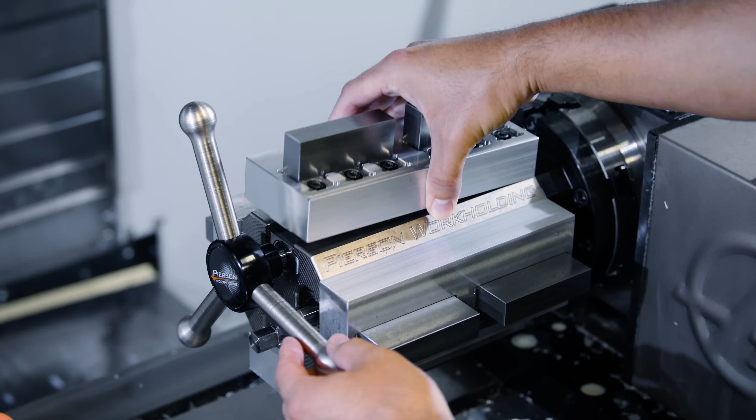Let's get started. I was made for this. I was made for this.

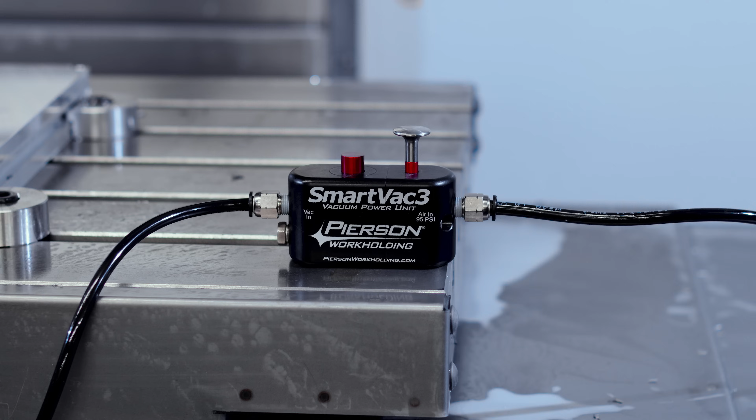Okay, so before we get started, let me give you a quick overview. Now, our vacuum work holding systems use high power vacuum to actually pull the parts down to either our grid surface of the base or our customizable top plates, which is what we're gonna talk about today.

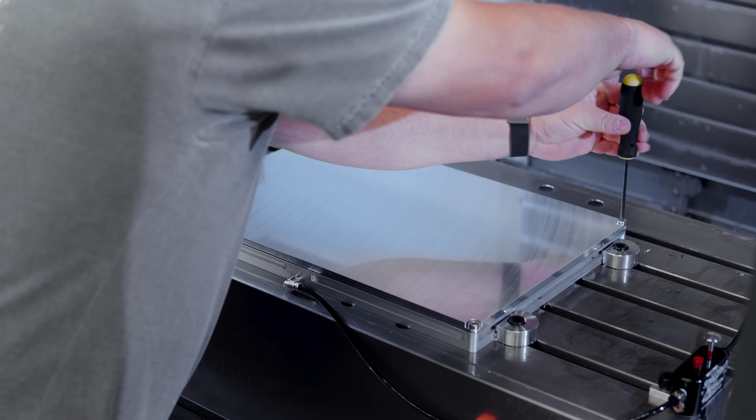But for now, let's take a look at this part. Now, the part that we have here is actually pretty common. It's known as a rack mount panel as a general term. Now, these panels have a standardized width of 19 inches, and they come in different height increments of 1.75 inches. So here we have what is known as a 2U panel, which comes out to 3.5 inches tall.

Now, this part has a couple windows, a few holes with big chamfers. I think that's for lights. 7 holes here that are the same size. I'm guessing those are for knobs. And a couple here that are probably for different inputs or larger knobs. And of course, I'm thinking this cutout here is for a power switch. Again, a very common type of thing that we see on these rack mount panels.

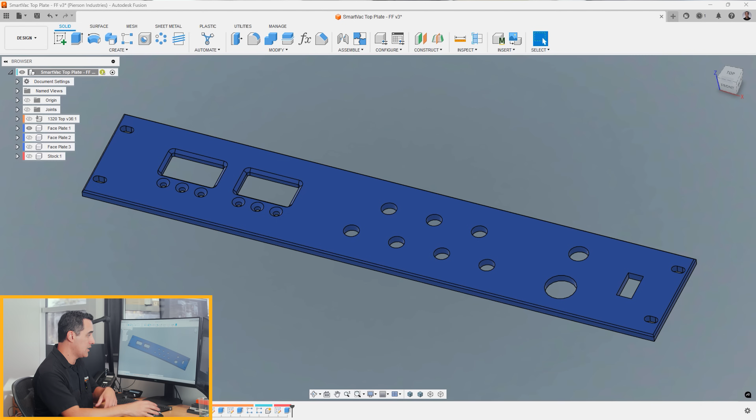But when it comes to vacuum work holding, the very first thing I like to do is to look at what type of surface area we're dealing with, specifically the surface area on the bottom of the part. Now, if I come over here, I'm gonna get a quick measurement. Now I'm using Fusion 360, and by just clicking this flat plane, it gives me the area. So using a calculator, 56.5 times 14 gives us 791 pounds of holding force.

That's great. Now 14 is the power of a vacuum. Now specifically our Smart Vac system, for every square inch, it will pull that square inch of material down with 14 pounds. Now that 14 pounds is not an actual limitation of our system. This is the actual air pressure around us pushing down on the part, trying to fill in the vacuum of air that we will be removing from under the part.

Now, the main rule of thumb is if you can hold a part using a clamp or a vise, you just stop and you do it. Now, this is because clamps and vises have a theoretical unlimited amount of clamping force. The harder you tighten the handle, the higher the clamping force. Of course, it'll break at some point, but still the amount of clamping force is theoretical, whereas vacuum maxes out at that 14 pounds per square inch number.

But as I look at this part, it's a decent candidate because we have to machine around the perimeter of the part. We have to poke a bunch of holes in it. And if we had to do chamfers, which we do, we can access them without, again, hitting any clamps or vises along the edges.

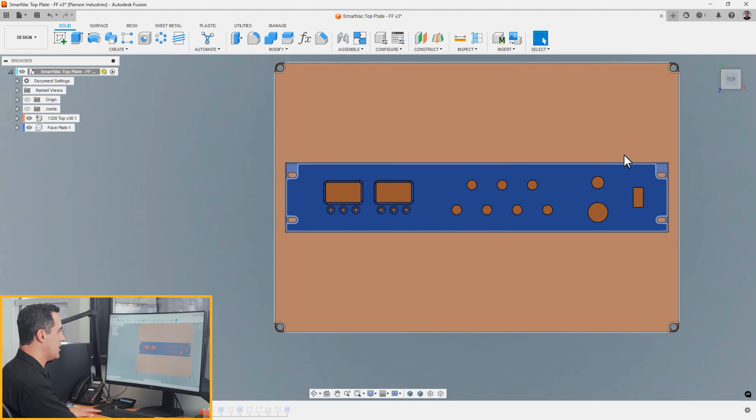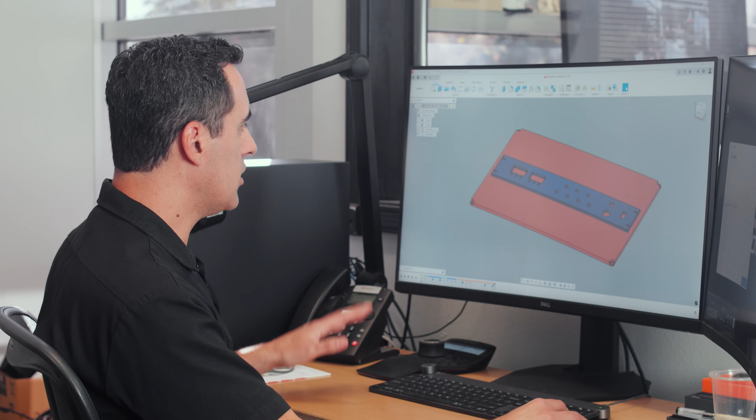Okay, so let me start off with a top view. Now, just to start off, this is a 13 by 20 inch top plate. Now, these are off the shelf products that we carry a full stock on. Now, when I first look at this, the way that I like to design is I want to put my part and I want to lock it to the center of the top plate. I've gone ahead and I've already done that. Now, let me hide our workpiece and let me show you the design work that I've done on the top plate.

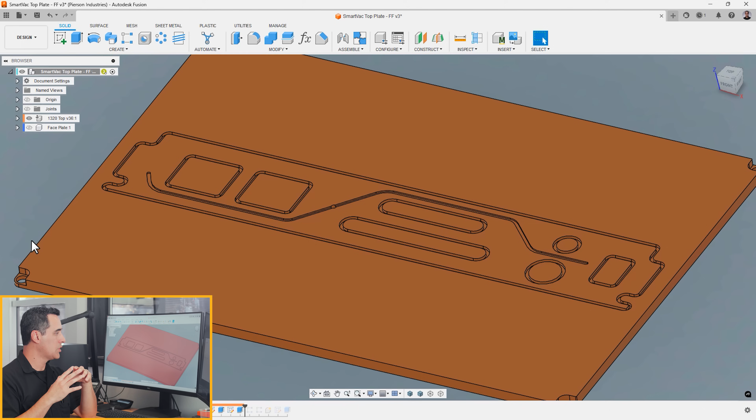Now, as I hide the part, that reveals a few different grooves that I've cut into the top plate. Now, the grooves in our top plate is what actually creates an airtight seal around every feature that's on the outside of the part or any features that break through. So you can see that it does look complicated, but it's actually pretty easy to do. Let me turn the part back on and give you kind of a see-through view of the part.

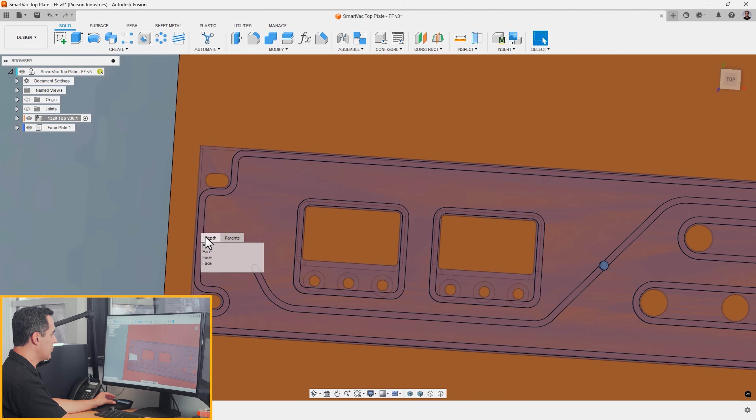Now, as I explore around here, you'll see that some of the features that are holes that break through are outside of this gasket groove, highlighted in blue. Now, along the outside is one thing, and then every feature along the inside is a feature that breaks through as well that's also gasketed off. So for example, these windows here, you have the holes, the 3 holes for what I'm assuming are the lights, and then the window for probably like some type of voltage meter that breaks through.

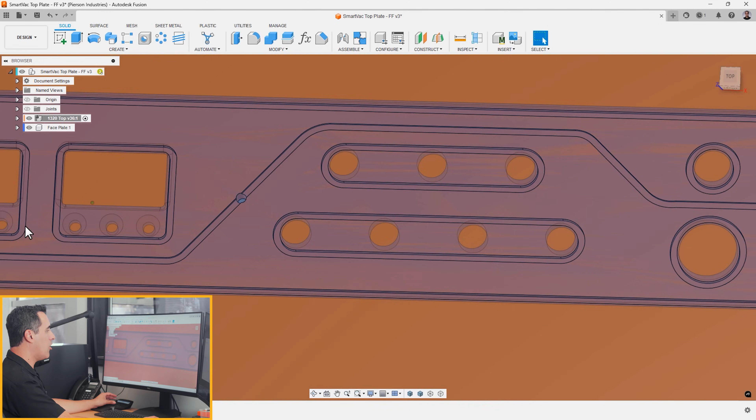All the knobs, and notice that there's a difference between these holes here, this grouping of holes, and these 2 individual holes. Now the grouping of holes, I like to do that because it's best to not individually gasket small holes, because it's actually kind of hard to get our gasket cord stock to wrap around on a round portion and then splice them together perfectly. I prefer to splice them on one continuous straight edge.

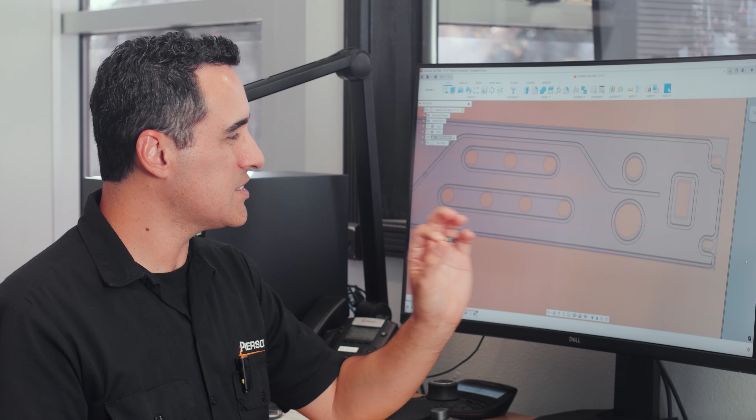But you can see I went with gasketing off these 4 holes and these 3 holes. Then these 2 holes, I could have gone to group them together, but because they're a slightly larger diameter, I'm going to gasket them off because I do want some air to flow in the middle. Now you do see as we zoom out, this odd kind of hole or slot right here. Now that looks weird. I'll explain that a little bit later. But for now, just focus on the gasketing that I've done in the top plate.

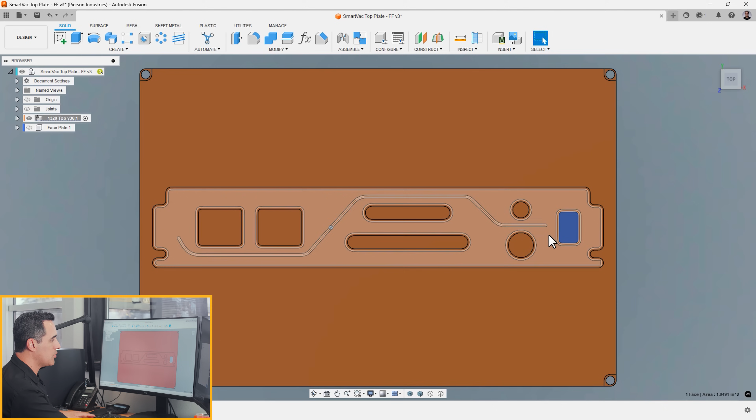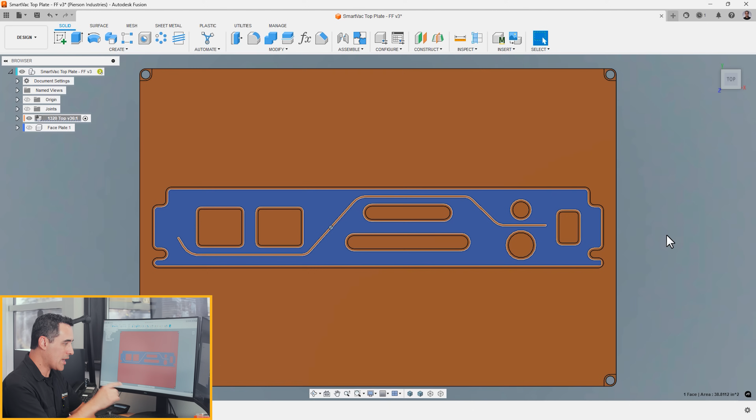So now you can see that all the features that break through are going to break through into these areas here. All these areas that are on the outside of the vacuum. Everything in orange here is going to have vacuum work holding applied to it. Now, remember I had that number of the surface area, 791 pounds of holding force. Now that we've created this gasket pattern, this area right here is the actual surface area that the vacuum is going to see. So right now, Fusion is telling me that it's 38.8 square inches. Now I'm going to multiply that times 14 pounds per square inch, and that gives me 543 pounds.

Now that's a lot lower because the gasket and all the little things that we've cut out takes away from the surface area. So the name of the game here is to always have to chase after surface area. More surface area means higher holding force. 543 pounds is still pretty good for this part, but we're going to have to adjust our approach so that we can bump up our feeds and speeds and actually stay productive.

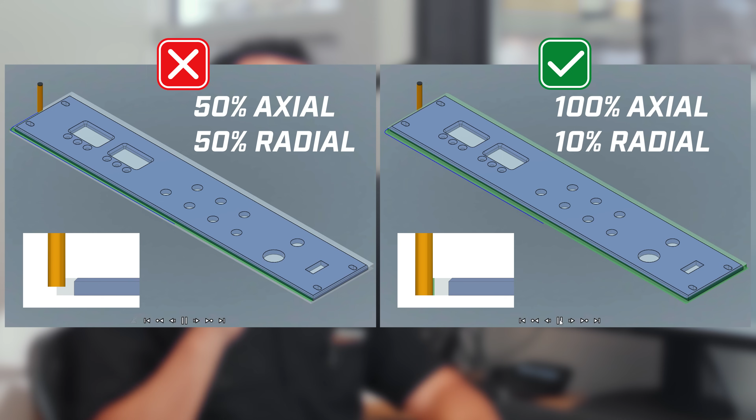Now let's take a quick minute to talk about feeds and speeds. Now the enemy of vacuum work holding is not lifting forces from the cutting action. It's actually the side loads created by the cutter entering the part. So the strategy for machining in vacuum work holding applications is light radial depths of cut and normal axial depths, because we're dealing with thin parts. They're not tall. This particular part is only 1/4 inch thick. So we go full depth and light radial loads. Now we want to aim for about 10% of the cutter width, and then we bump up the feeds and speeds so we can zip around the part faster with lighter loads than actually going into the part itself.

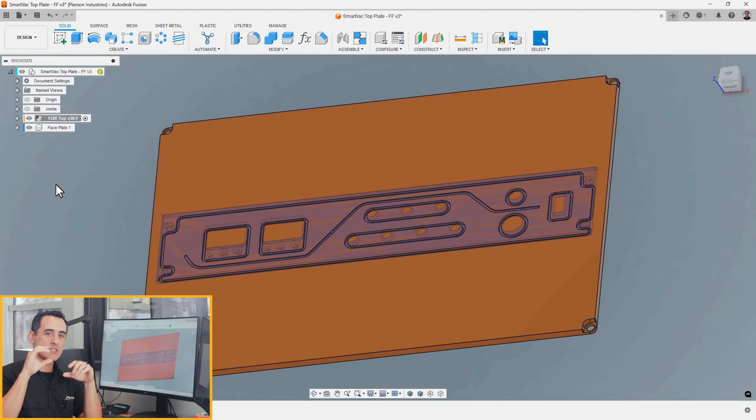Now here comes the caution. Now we do have a large flat face that oftentimes people want to remove material down to a specific thickness. But face mills, especially face mills with large diameters, impart massive amounts of side loads. Now, if you needed to face this part down to a dimension, you'd want to do so in a second operation with a couple pins along this back edge of the part.

Now, that way, the clockwise direction of the cutter moving from right to left is pushing the part into those pins. We're not minimizing any cutting forces, we're just directing them into pins that are going to add to the rigidity and the security of the entire application. Now, if we didn't have those pins, we would run the risk of the cutter incrementally sliding the part over, and once it gets off of the gasket cord, you have a break in the seal, and that's when your part has a chance of turning into a very nasty frisbee. Now, let me show you one thing that I talked about earlier.

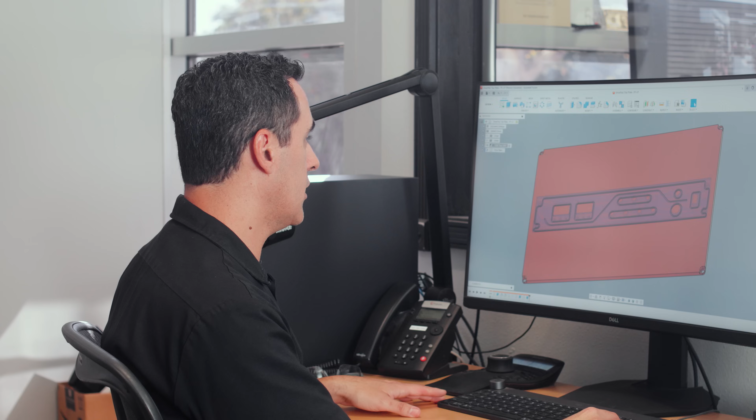So remember this groove here in the middle? Let me highlight it. It's actually a different depth than the rest of the gasket grooves. Now, if you notice, this gasket groove is not full depth because it breaks through into this through hole.

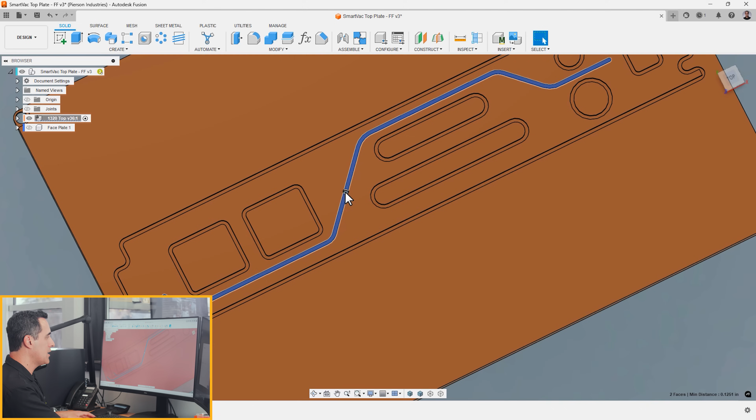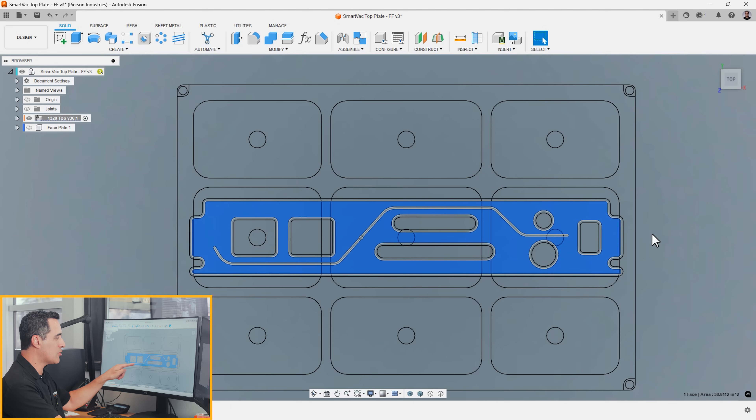Now, this through hole, if I give you a wireframe view, is what introduces vacuum from the chuck surface up through the top plate into this gasket area that I've created. Once it flows into there, we add this weird groove to help the vacuum or the air flow across the surface of the part.

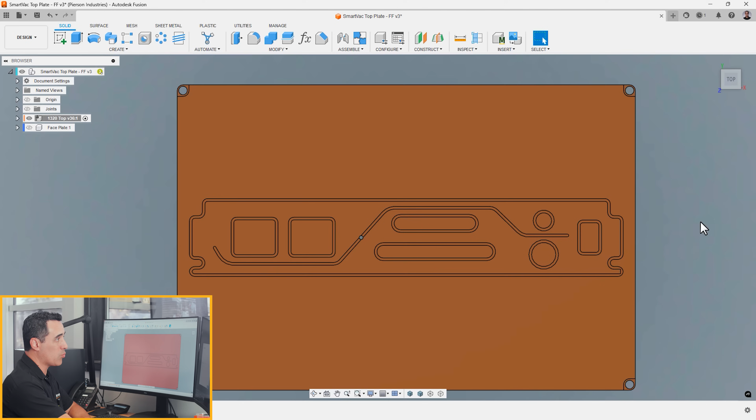We do that because there's a chance that parts can self-gasket to the vacuum chuck itself, especially around the small diameter of the through hole. So if you are working with a really thin part sitting on the top plate, you might have 100% vacuum at the center, at the through hole, but it might slowly leak and lift up along the edges. We definitely don't want that.

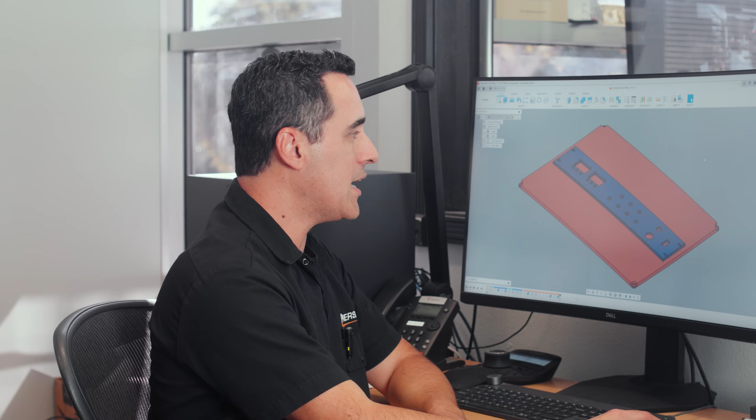So to minimize that, simply adding that groove that snakes its way around the different features is going to create a lot more opportunity for the vacuum to spread across the entire face of the workpiece.

Now, another question I get is, okay, I'm gonna drill a through hole, but I want more vacuum. So do more through holes mean higher vacuum? No. And actually, we recommend you only do one through hole. The reason is more through holes just means that the airflow is divided. If you have two, it's divided between those two. If you have one, all the air rushes through.

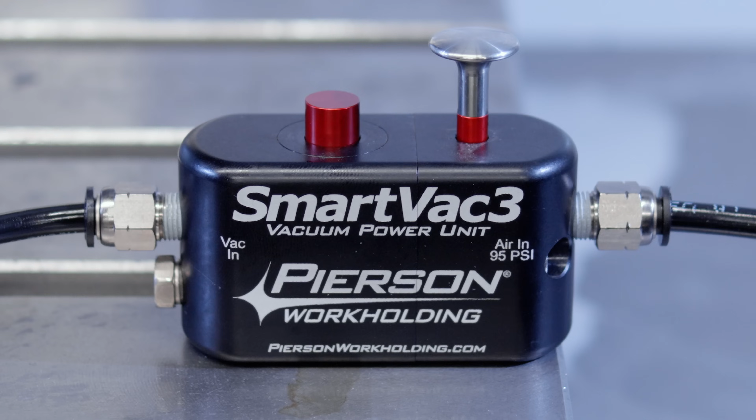Our vacuum power unit pulls vacuum on a 1320 chuck in about 1 to 2 seconds. It's going to reach maximum vacuum in just a couple seconds. Adding more through holes could, in theory, increase that, but you couldn't turn on the vacuum, close the doors, and hit cycle start in 2 seconds. At least I can't. So one through hole.

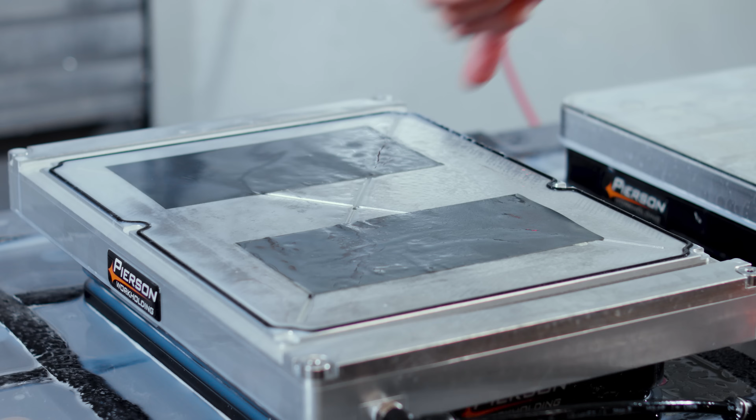The other thing is you want to minimize the chances for chips or swarf or particles to enter the vacuum system. With one through hole, you can literally put your finger on it and blow chips off of the top plate, and then when you're done, lift it. That's how you assure good working conditions to not clog the vacuum power unit.

Now, quick note, the vacuum power unit can deal with coolant. You're going to ingest coolant, and of course small particles, swarf-like things. But when things get clumped up, or if someone didn't clean it out after the end of the run and put it on the shelf, the coolant dries on those chips, the water evaporates, the concentrate sticks around, and it turns to a really thick sludge that can easily clog the VPU the first time you run it on the next job. So we always want to work with a clean working environment.

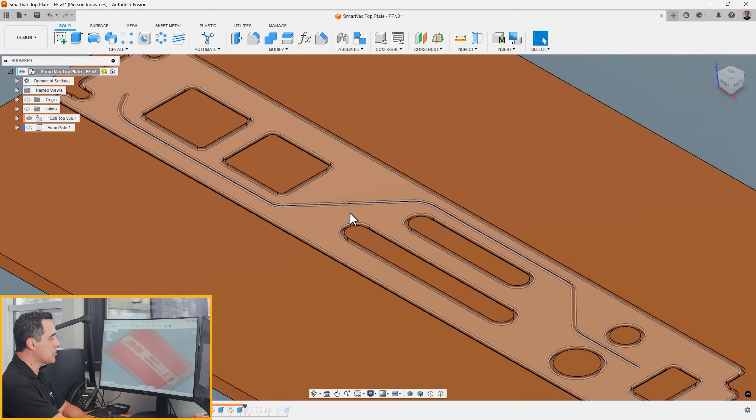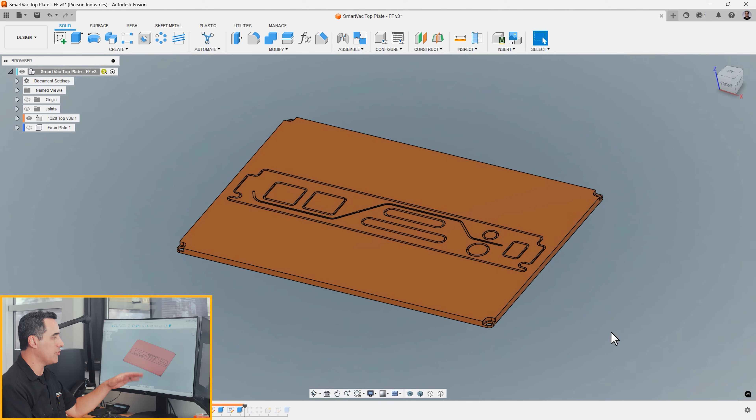Now, when I poke this through hole, how did I pick that? Did I dimension it? Well, no, it's actually randomly picked, but I pick it to break into this pocketed area. When you poke through with a drill, you can drill into any one of these 9 pocketed areas. They're about 50 thousandths deep, and the vacuum from the grid surface of the vacuum chuck flows into these 9 pockets. So anywhere you poke into them, you will get full vacuum flow to the top side of your part.

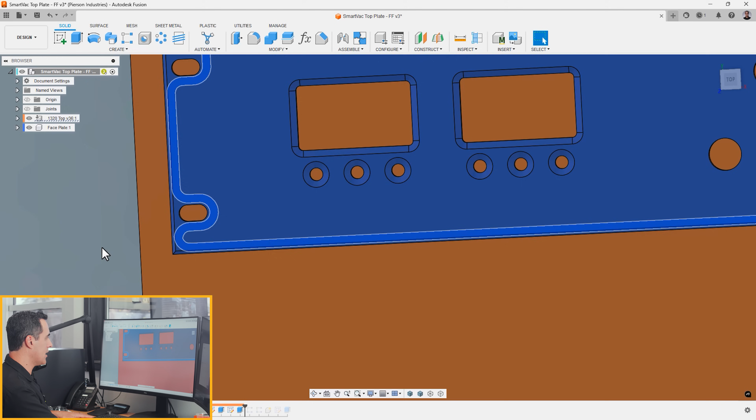Now, there's one last thing I want to draw your attention to, because it's a mistake that I intentionally left for this illustration. I'm going to zoom into these corners. When we run our gasket in this groove, we're doing everything right because our part is gasketed correctly, but there's a difference between these two corners.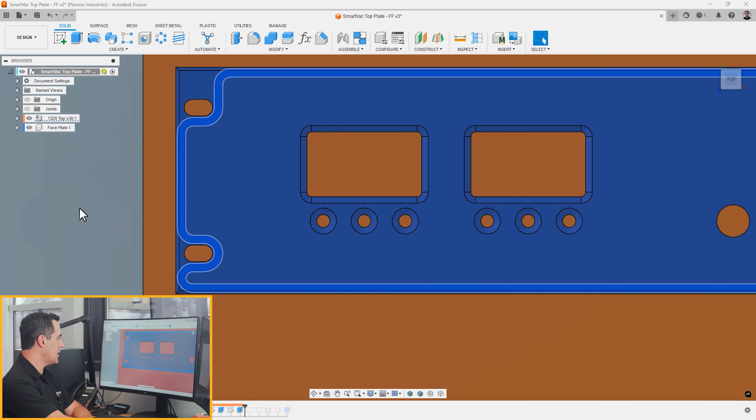You can see what I did here with this groove. I went around this oblong hole and snaked it around to, again, maximize our surface area. Over here, I didn't, so we have a corner free floating. The truth is that this section is not actually going to give you very much vacuum work holding. In fact, you will have your part sitting up high in that section, because there is just not enough surface area to fully compress the gasket surrounding that area.

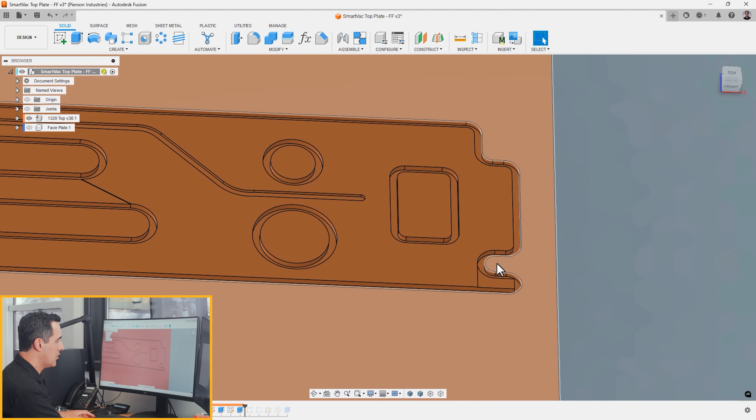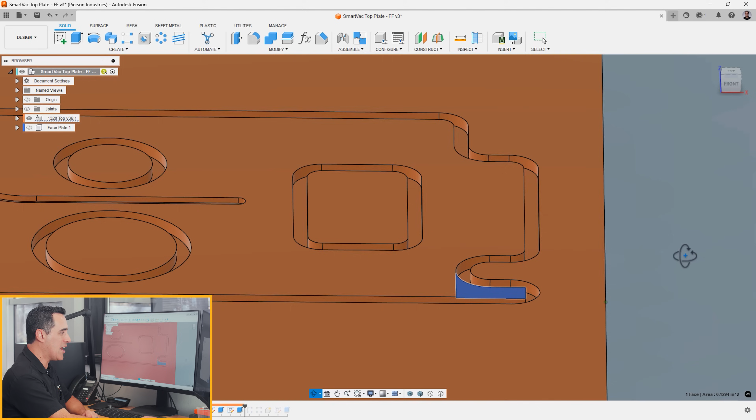I made a feature here, a little quick cut to illustrate. Okay, so this little surface area here, if you can see that, I left some square corners. Fusion is telling me that that is 0.1259, let's round up to 0.13 square inches. If we multiply that by 14, that's only 1.82 pounds, I'll give you in ounces, 30 ounces of downward force trying to compress that gasket.

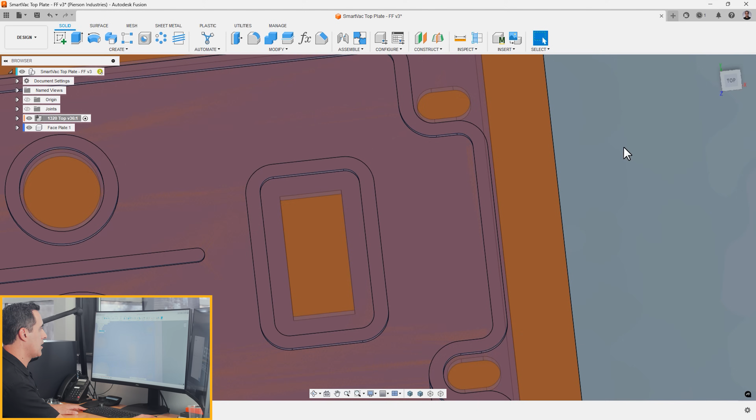30 ounces is not going to add to the rigidity of the part. It's going to barely be enough to compress that gasket, so it's kind of a wash. So the better thing to do is just cut off the corner as shown up here, so that we can actually skip that bunched up amount of gasket and just go straight to cutting the perimeter.

Now keep in mind, this is 1/4 inch thick, so it's not going to lift, it's not going to do anything crazy. In this case, skip any surface area that could be generated because, once again, it is a wash because it's trying to compress the gasket. Just cut it short. Now there's another section of this part that is along similar lines, and it's this center section here.

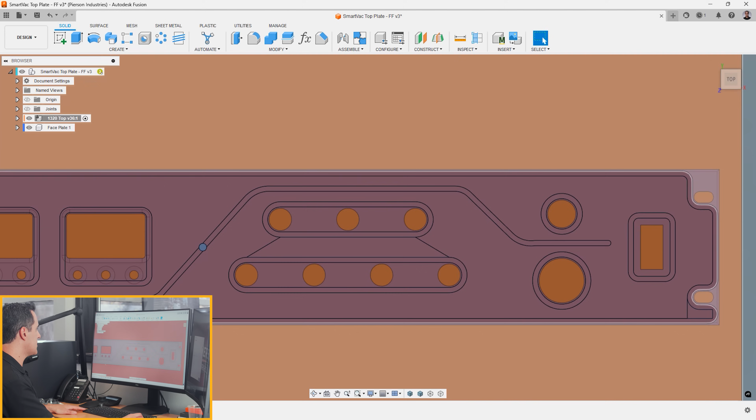This center section, keep in mind, it's between two lengths of gasket. So gasket is going to go in this groove and it's going to go in this groove. Now, when we look at that, we go, well, that's fine. There's going to be vacuum flowing in these areas here. But really, the surface area here is the only surface area that's, again, trying to compress these areas of the gasket.

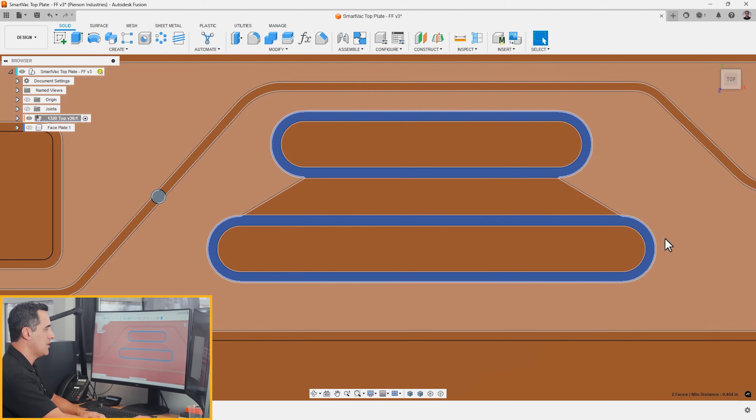Now, I went ahead and took a quick little cut. Fusion is telling me it's 1.7 square inches times 14, giving us about 24 pounds. Now, in that section, 24 pounds is definitely enough to compress the gasket in that groove.

Now, the rule of thumb is that, if you're having parallel sets of gasket, I like to see 4 times the gasket diameter width. So that means if we're using an 1/8 inch gasket, 0.125 times 4 is 1/2 inch. We've actually got 0.464 inches between the gaskets.

That's close enough. The bigger principle is you do not want to have very narrow sections between your gasket because there just isn't enough surface area to compress the adjacent gasket. Now, the rule of thumb, again, is to have enough surface area between lengths of gasket to compress it in its groove.

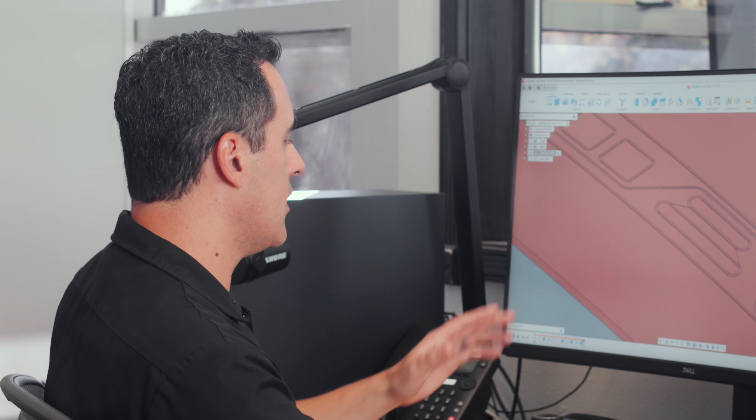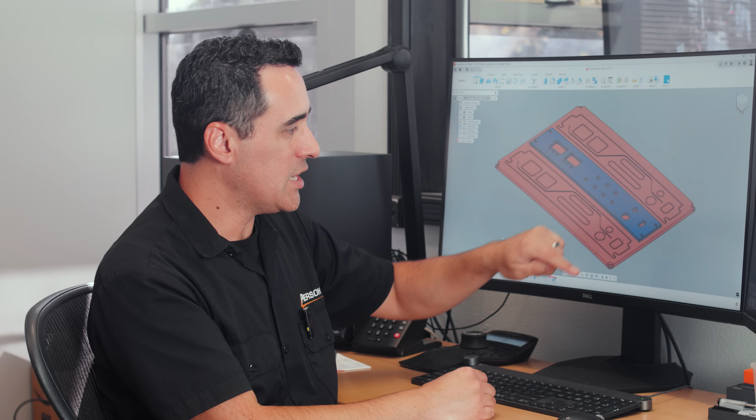Now, I have one last trick I want to show you. So let's go back to the main, let's turn everything on, and we're going to roll forward the time marker, and I'm going to show you one last tip. Now, as I go fully forward, you'll see that I created a pattern out of this. So I created my gasket grooves, my through hole, my air channel slot, and now I patterned it both ways.

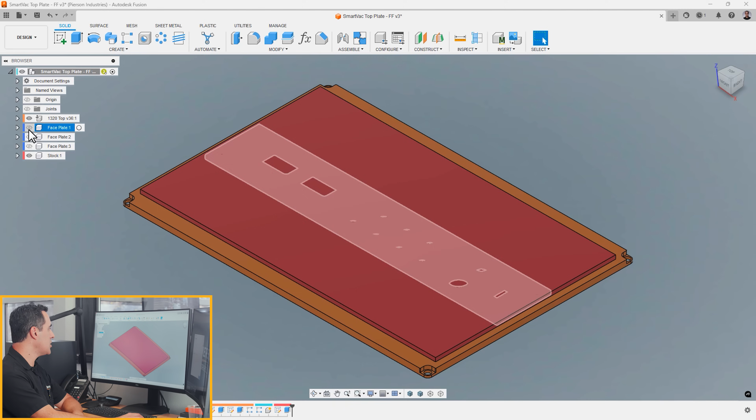Now, this is important. Most of the time you would think, oh great, I'm using the full surface area of my customizable top plate. Yes, but there's one more added bonus of going to multiple pieces. And you'll see when I turn on the stock, we're working from a single large piece of stock. We do that because while we're machining one part, say here on the end, we're actually using the cumulative surface area of the other 2 adjacent parts to give stability to this one part.

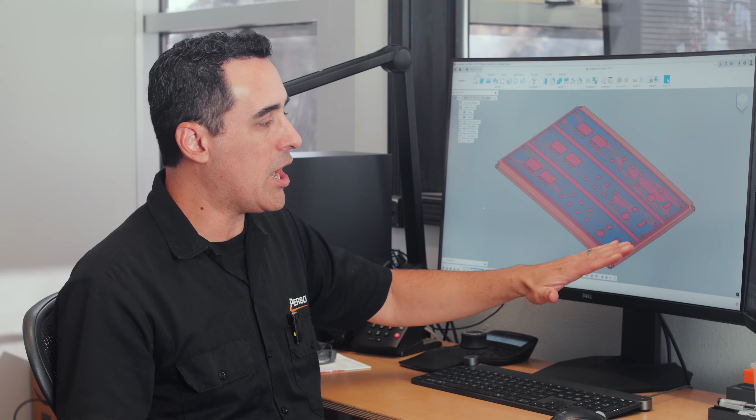Now, the trick here is to do all the features except on the perimeters. You want to rough machine and leave about 10 to 15 thousandths of material at the bottom. Then your very last cut in the entire machining cycle is to use a finish end mill to go full depth in Z so that we break the parts out.

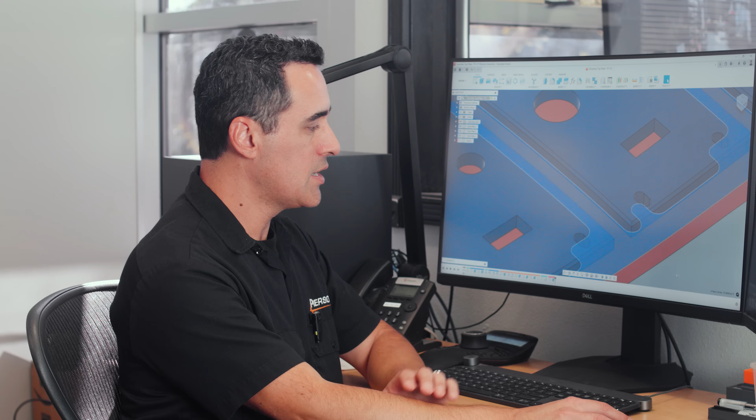Now remember, we're going to have a very thin foil between the two parts in this section here. While they're connected, they are going to add stability. When we break through 100% in Z, then we're doing the perimeter cuts along the edges of the part, and then those parts are on their own.

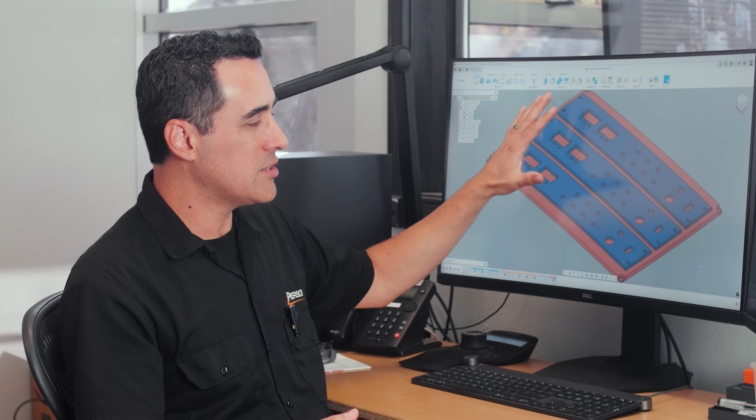Now remember, we had over 500 pounds of holding force. When we approach it from this technique, now we have 1,500 pounds of downward holding force, holding all three parts instead of 500 pounds on each part. It's a little added trick that all the vacuum workholding pros do. So if you're quoting a part, don't quote the individual blank size. Quote larger pieces in which you nest smaller parts within it.

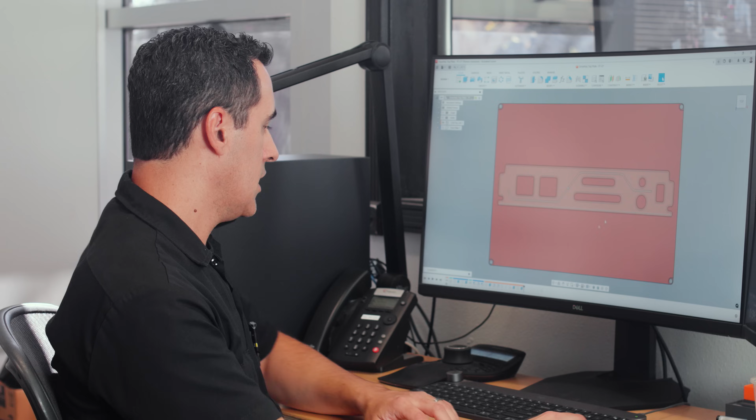Now, let me take a minute here to jump in and show you some really good CAD tips, specifically in Fusion 360. I'm going to open this first sketch where I actually drew it.

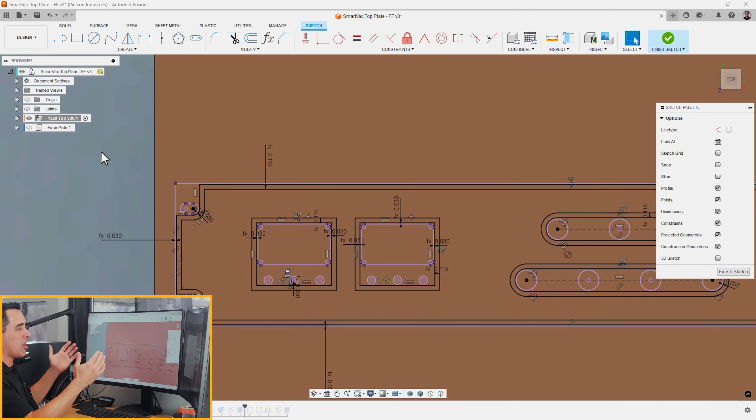Now, if you're a Fusion user, you may recognize some of these colors. For example, these purple or lavender ones, that's the projection of the part onto our customizable top plate. Now, I like to have that just so I know what type of geometry I'm working with and then work off of that. Now, in Fusion, one of the most powerful tools you have is parameters.

Now, if we open the parameters panel, I created 4 user parameters and I named them OO, which is the offset from the edge of our finished work piece to the edge of the gasket groove itself. I used GW for the gasket width. I used IG and OG for the inside gasket and outside gasket, and these are going to refer to the radiuses that we're going to put on just towards the end of this.

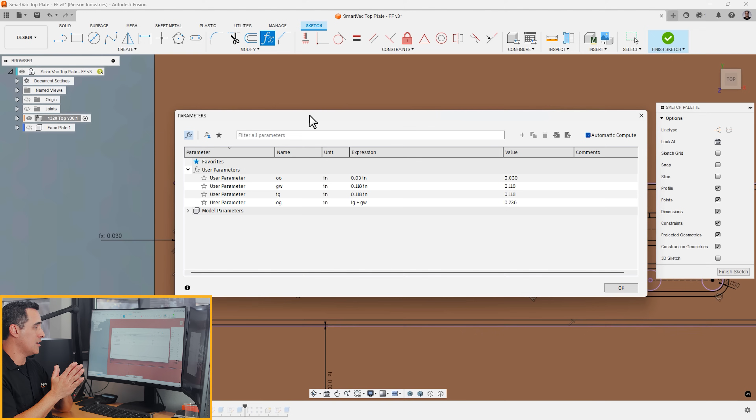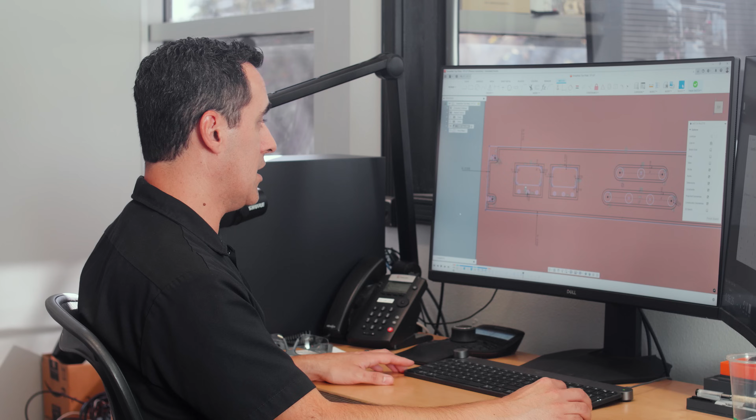Now, why did I name it OO? Well, the best designer is a lazy designer. If you don't care about dimensioning things, you should skip dimensions. Dimension one thing, and if it's similar to another hole, just have an equal constraint. It's always best to kind of declutter your sketches. Now, you can tell that this sketch does look a bit cluttered because I had to go with dimensions to the edges.

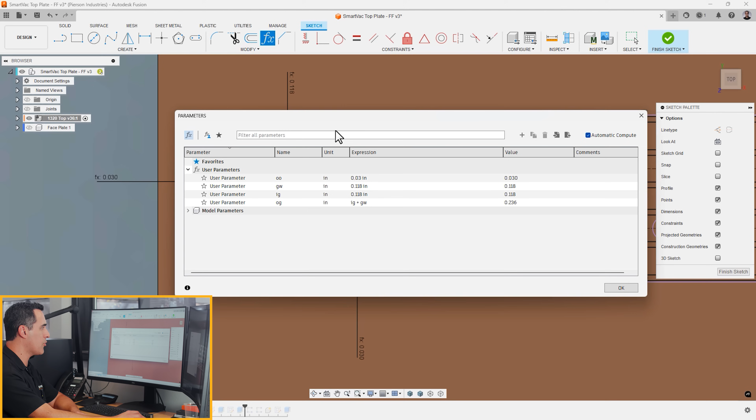Now, for example, when I go to select this edge here, so this profile right here is my groove. And then the edge, you can see this formula here, it's OO. And when you do that, it plugs in 30 thousandths of offset. Now, if I ever wanted to change that, I could go into my parameter and I could say, okay, instead of 30 thousandths, let's make it 50 thousandths. And it updates with a little bit of extra edge clearance. Let me Control Z it, that's undo, bring it back out. And I've done that everywhere.

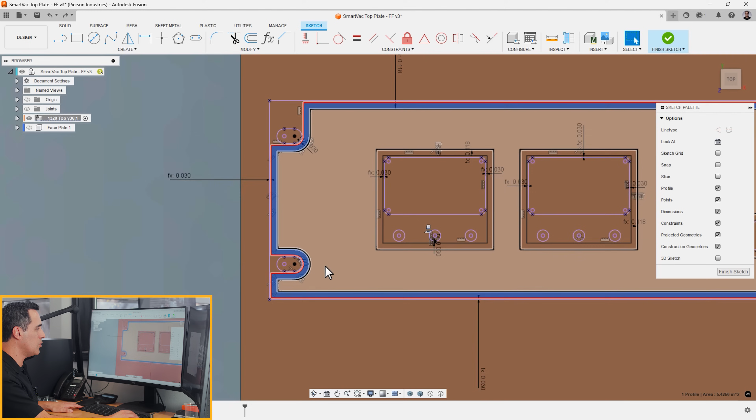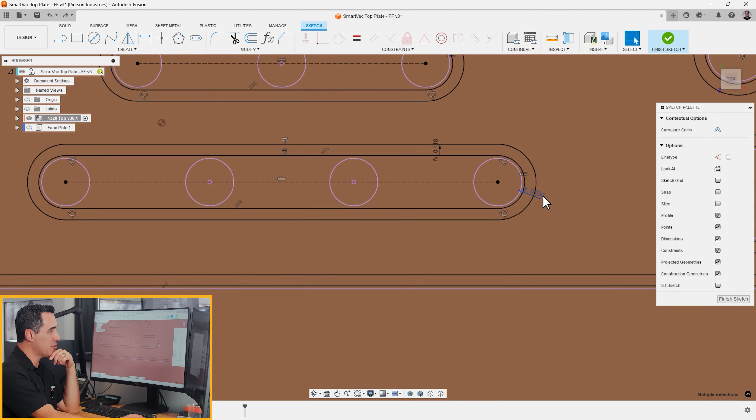Now, to zoom in, I've actually gone around with kind of like these horseshoe shapes around a lot of the holes that break through. Again, we grouped in these 4 features here as just one big box rectangle around them, because I don't want to, again, do individual holes. I want to do sections, gasketed sections. Also did the same thing here, that's identical. I used what's called a center to center slot and opened it up. And again, the gasket groove is another feature, OO. That was my gasket groove.

If I wanted to go down in size and change it to maybe our 1/16 inch gasket diameter, I could open gasket width and I could go 0.062, and you could tell now our gasket is a very thin groove. By the way, the formula for your gasket groove, if the nominal size is like 1/8 inch, you go 80% for the depth, 95% for the width. So if we plug in the math, if we take 0.125 times 0.95, 95%, it gives us a gasket width of 0.118.

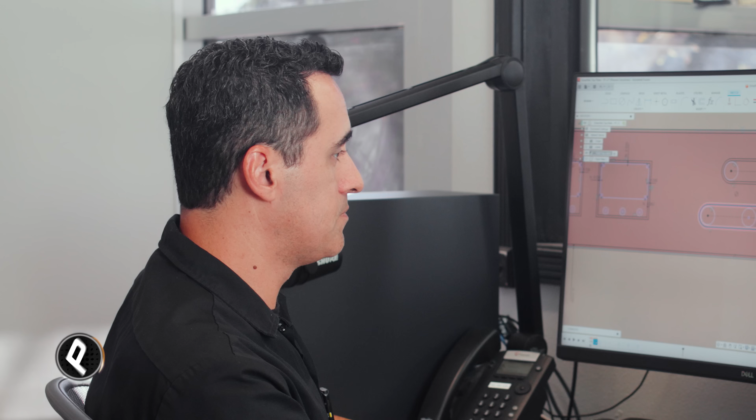If we take 0.125 multiplied by 0.8, it gives us exactly 100 thousandths. That's our gasket groove depth. That's a formula that's similar across all our different gasket sizes, but we always want to push you towards our 1/8 inch, which is the most versatile. Now, let me finish out this sketch.

And what I did here in the corners is, it's always best to not have sharp corners when you're putting the gasket into these grooves. Now, our gasket material is very soft and pliable. You can turn a sharp 90-degree corner, but it just extends the life of the gasket if there's a slight radius, and it also creates less of an elbow bump.

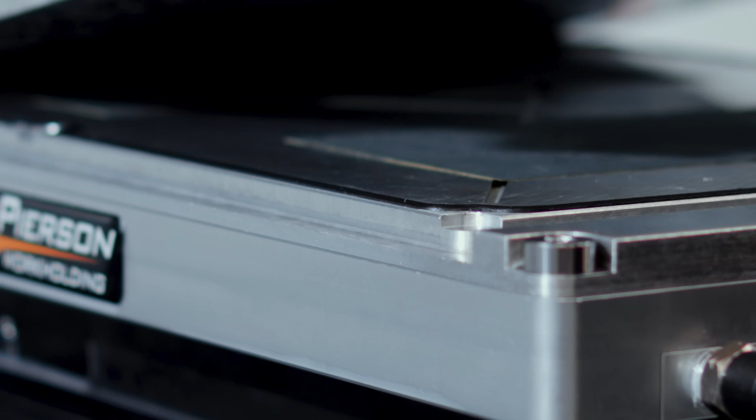Now, we all have elbows, and when we bend our elbows, we have this little bump that forms right here. Now, when that happens to gasket, it creates a higher surface that the part can sit on, and so you don't get that nice even bottom of the part contact with the top crest of the vacuum gasket. So a slight radius kind of helps out.

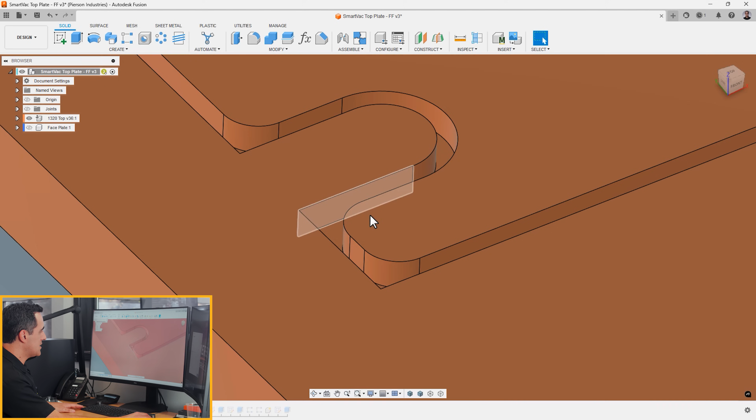So as I roll the timeline marker forward, you can see that I have these 2 dimensions. Let me give you a better shot. 2 dimensions of this inside groove, and then when I roll it forward, the outside groove itself. And again, that was specified in my parameters, IG and OG, which is 0.118. And then OG, I plugged in this formula, it's IG plus GW. So basically 0.118 plus whatever our gasket groove width is.

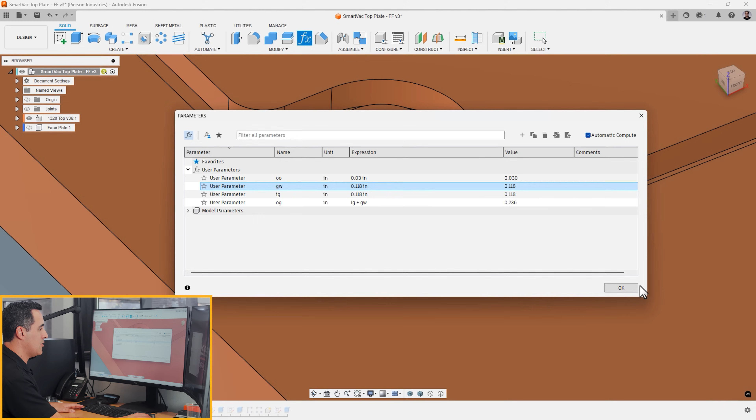So let me change this back to 0.118. And then you can see in the background, it kind of updated. So if you have parts that are kind of like this, vacuum work holding might be a fit for you.